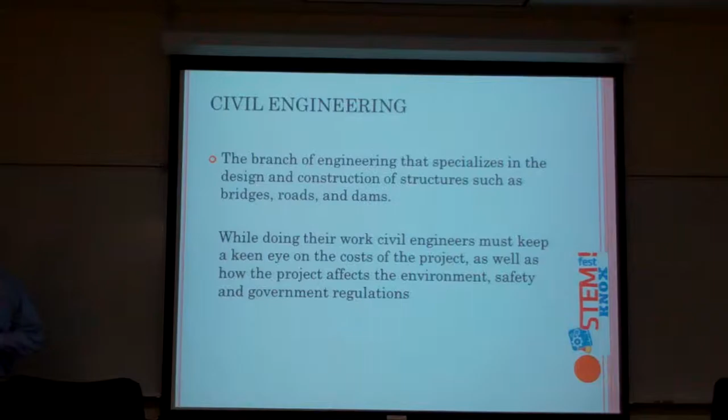Civil engineering is the branch of engineering that specializes in the design and construction of structures such as bridges, roads, and dams. This is what civil engineers do in their careers. While doing their work, civil engineers must keep a keen eye on the cost of a project as well as how it affects the environment, safety, and government regulations. So all that stuff's important - they have to think of multiple parts of their job.

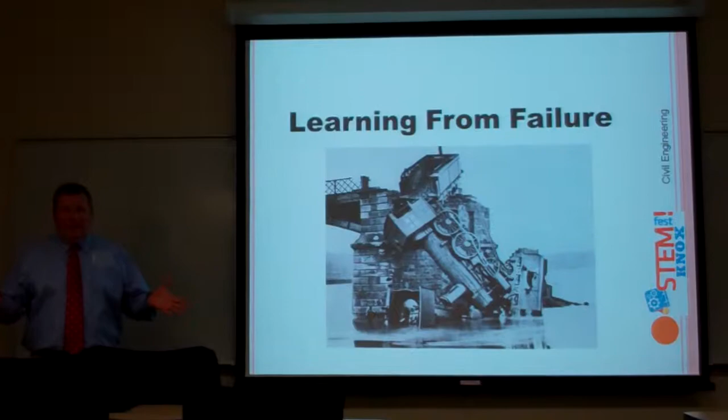An important part of building a bridge is learning from failure. You don't want failures to happen, but usually if something does fail, we study it and try to figure out why, because in all phases of our lives, that's how we learn. This is really critical in bridges, since failure can involve loss of life.

So why would we build a bridge? Anybody have ideas why you might build a bridge? I saw this and thought it was kind of like why the chicken crossed the road - to get to the other side, right? That's pretty much what a bridge does - you can cross over a natural or man-made obstacle, like a stream or river.

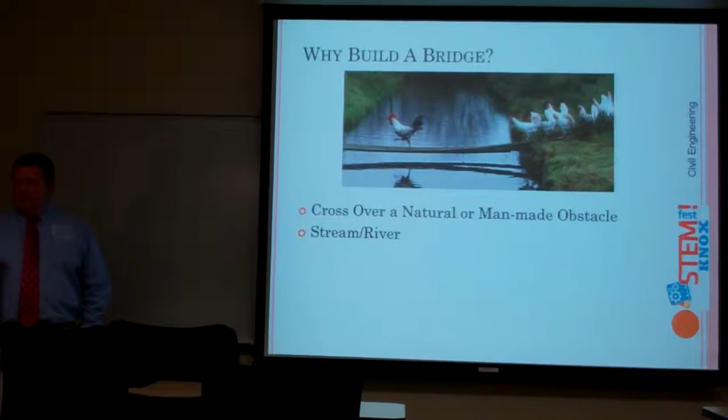Most of you probably are acquainted with bridges that cross over streams or rivers. Over highways, I'm guessing you've seen those too. Over a valley - there's a few, though I can't think of any right around here, but in mountainous areas they cut across valleys here and there. And over railroads, those are around a bit.

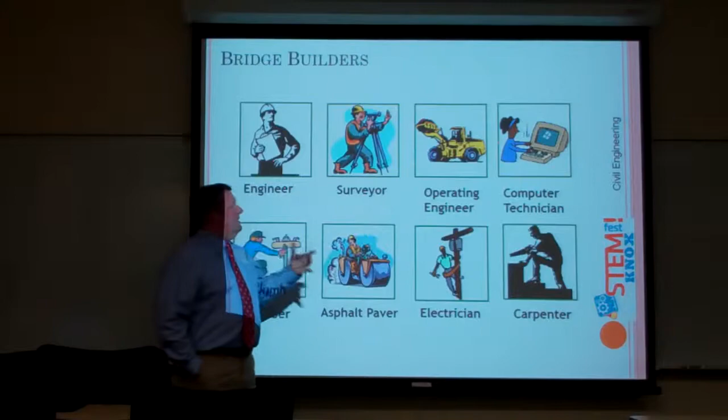There's all kinds of careers involved in building a bridge. You have engineers, surveyors, operating engineers - the people who engineer the way it's going to get built. Computer technicians have to help support it. There could be plumbers involved for plumbing, waste lines, and stormwater. Of course asphalt pavers, electricians if the bridge has lighting, and carpenters to help build the bridge and the formwork for concrete. So lots of careers involved in it.

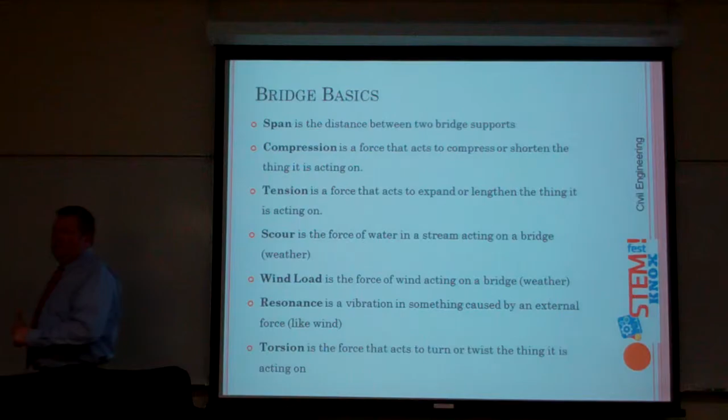Bridge basics - this is stuff you're going to want to study up on as you work on your bridge, but I'll review these real quick so you know the terms. The most important term is span - that's the distance between two bridge supports.

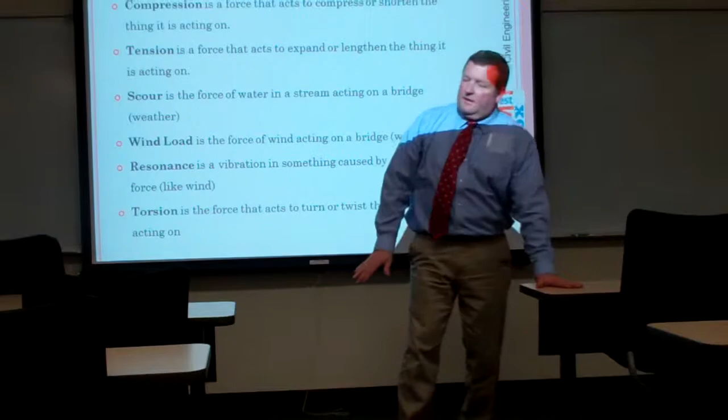If you were building a bridge from this desk to this desk, the span is the opening between them, so the bridge has to arch over that. If this was 3 feet and you build a 3-foot bridge, what would happen in total length? It's going to fall in the hole, right? So remember, span is that inside opening - the bridge has to arch over it and land on the table on each side. It's critical for you to understand span, or Rory's going to throw you out of the contest when you get there.

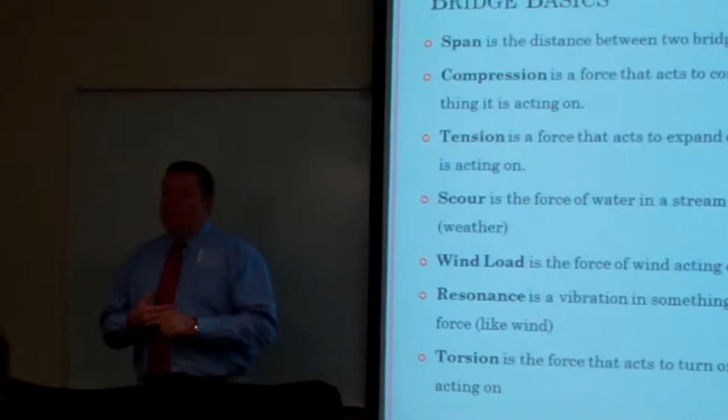Compression is just a force - when you push things together, that's a compression force, as you try to mash things. Tension is the opposite, as you try to pull things apart. So your bridge is going to have those two forces in it, compression and tension, and that's the magic of what you're going to do with these toothpicks - engineer them so they don't compress and fold up, and they don't pull apart.

Scour, that's kind of a bridge term. You shouldn't have scour with your bridge. That's a term for the water taking the footings out from under a bridge. So it's the force of water in a stream acting on a bridge.

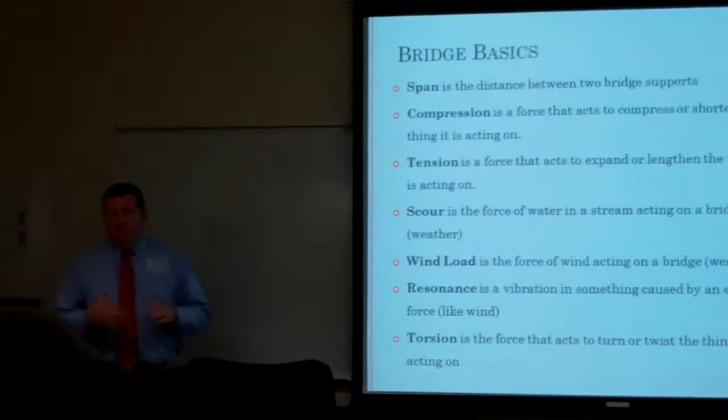Wind load, that's just the wind. You would be surprised, think of sailboats. The wind pushes pressure, so the structure has to take those pressures or loads that push on it.

Resonance is a vibration in something caused by an external force like wind. So resonance is kind of a sway. It relates to music, it's that kind of harmonic movement of something that is resonance.

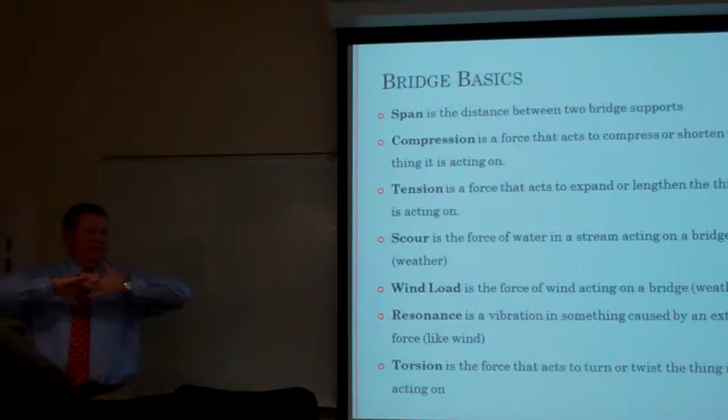Torsion is the twisting force, so things torse. We're going to see some examples of these in a failing bridge here in a bit in my video clips. Torsion is a force that tries to twist your bridge.

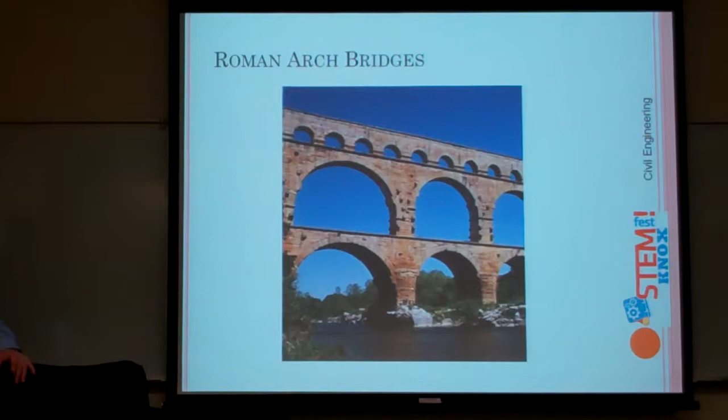History of bridge construction. Maybe that was the first bridge, I don't know, or maybe that could have been just a log across a river. That's where the concept of how to cross a stream might have come from, when logs fell across a stream and it turned into a bridge. Then the Romans got a little more complex with that. They developed the idea of an arch and started to build these complicated bridges.

Does anybody know what this really is? It's not just a roadway. Have you ever seen it and what it does? It's an aqueduct. At the very top of it, it took water into cities, a pretty neat concept of this kind of bridge. The middle deck here was for cars and people, and clear up there, there's a little trough for water that took water into cities. The Romans loved their public water.

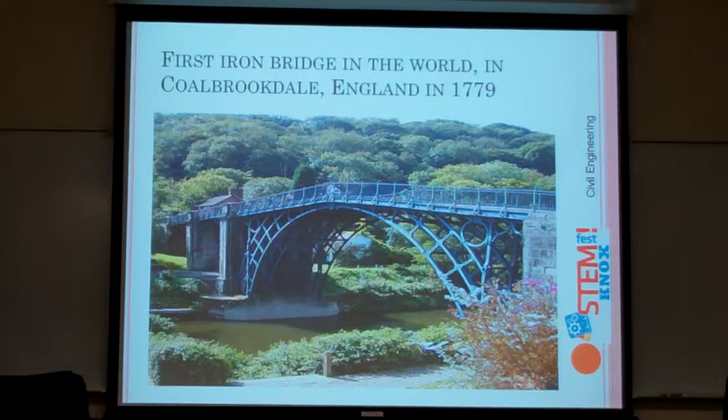This is a pretty famous bridge, the Coalbrookdale Bridge over the River Severn in England. It's important in a couple ways, it's the first metal bridge, and they developed the idea of mass-producing parts. So they cast these pieces, brought them out here and assembled a bridge.

So kind of mass production, and for an iron bridge, pretty strong. Steel and concrete bridges evolved from there, so most of our bridges today are made out of steel and concrete. You'll see some old stone arch bridges and things, but for the most part today, steel and concrete are the materials that we build bridges out of.

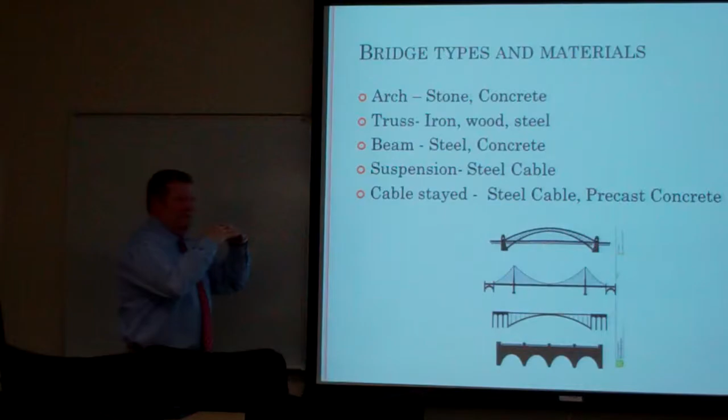There's about five different kinds of bridges covered quickly in this. So an arch, that's like the aqueduct we saw. Arches want to function all in compression, so it's all compressive force smashing down on the arch, and that holds them together. Then trusses have a combination of tension and compression in them.

So different pieces all have different forces, if you looked at this lattice work, some of those are in tension, some are in compression. It kind of varies which one's in which. Probably your toothpick bridge is going to mostly work that way, as more or less a truss, with some members in tension, some in compression.

Let's see, there's beams, just giant beams, could be made out of steel and concrete. Generally, the top of the beam is going to be in compression, the bottom in tension.

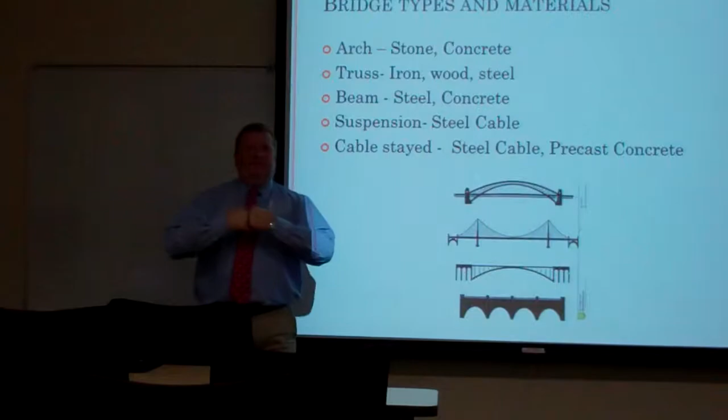Suspension bridges, steel cables, so all these cables hanging down, and this cable would be what kind of force going in those? Can you guess? Is that stuff pulling on it or pushing on it? You guys are like my class at school, nobody wants to tell me. So that's tensile force, right? That's like a string when you're pulling it, so it's tension in all those members.

Cable-stayed bridges are very similar, except the cables go right to... I don't have any diagram, there's some coming up, we'll see those. Cables go right to the bridge deck rather than a master cable.

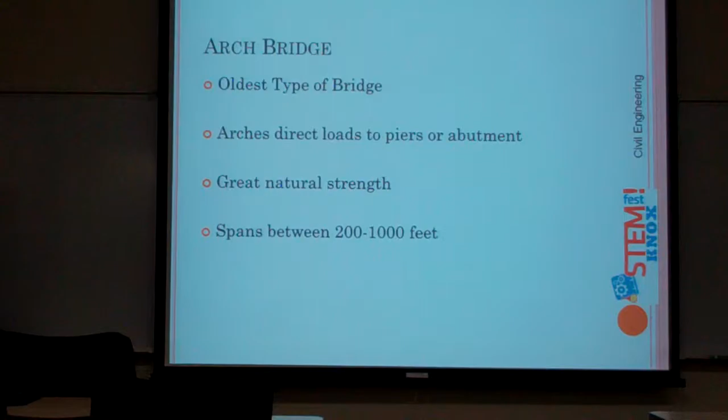So arch bridges, like we looked at the Roman one, oldest type of bridge. The arches direct loads to piers or abutments. Great natural strength, spans between 200 to 1,000 feet, and they do tend to all be in compression. Arches don't like tension, so all these pieces are pushing in on each other, especially right here at the base of the arch.

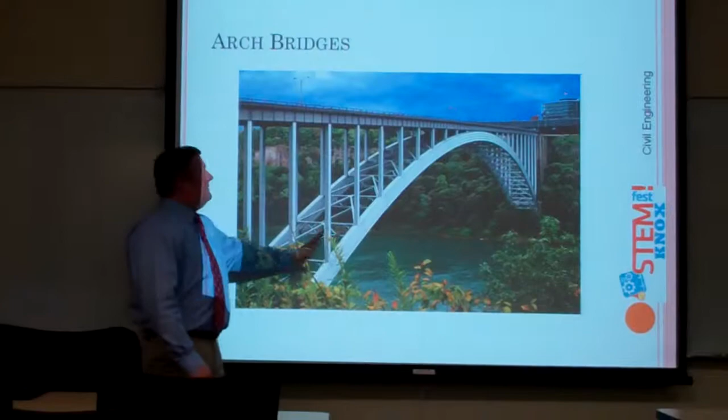There's an example of one, a stone arch bridge. And there'd be one that's kind of a steel, or concrete, I guess it's steel. So this is an arch, bottom of it in compression, and then the members bring it down.

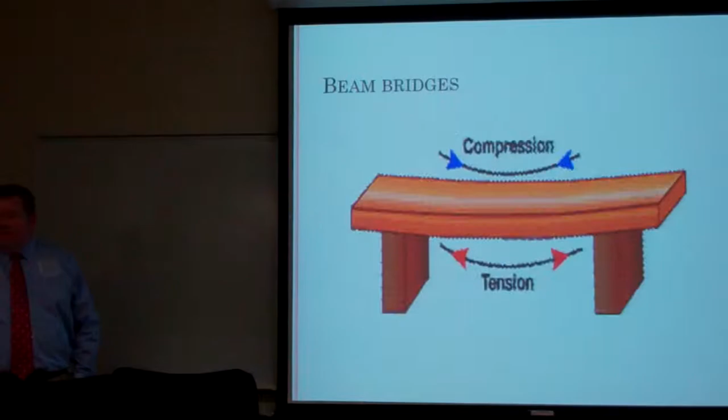Beam bridges are probably the simplest to build. They're just a simple beam. Loads are carried through piers to the ground. They're the least expensive and rarely span more than about 200 feet, so kind of medium span structures. The way it works as a beam: the top of the beam, like the roadway deck, is going to be pushed together in compression, while the bottom of the bridge will be in tension.

So that'd be an example of a beam bridge. Most of the highway bridges you see around here would be a simple beam bridge.

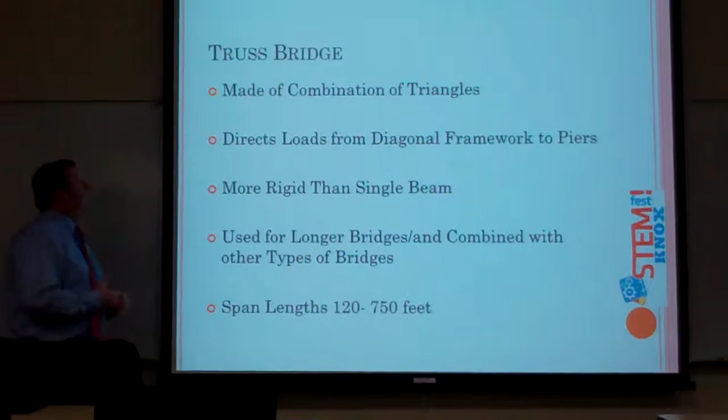Then truss bridges. This is closer to what I'm guessing you're going to build for your toothpick bridge, so it relates pretty closely to that. They're made of a combination of triangles, directing loads from the diagonal framework to the piers. The piers are what supports the bridge, and you'll be building those out of toothpicks too. Truss bridges are more rigid than a single beam, used for longer bridges, and combined with other types of bridges. The span length is a little bigger here, 120 to 750 feet.

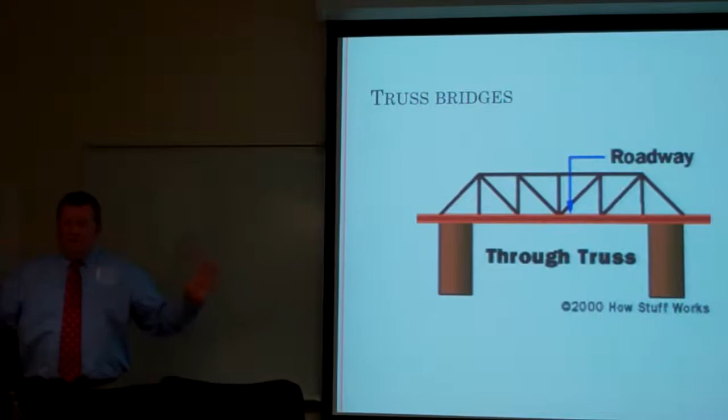There's a great example of a truss type bridge down here across the river as I drove into town, a nice big old truss bridge. I think it's for the railroad. Railroad bridges are usually pretty good examples, so think about those as you build your toothpick bridges. That's a good example of a railroad bridge.

That is a truss type bridge. Some of those members are in tension. If you look, the members in tension are rods, while the members that get more compression are more of a beam type thing. So you can almost see where the tension and compression are in that particular bridge.

There's one down in Licking County over the walking path these days, or bike trail. So that would be a truss type bridge, right?

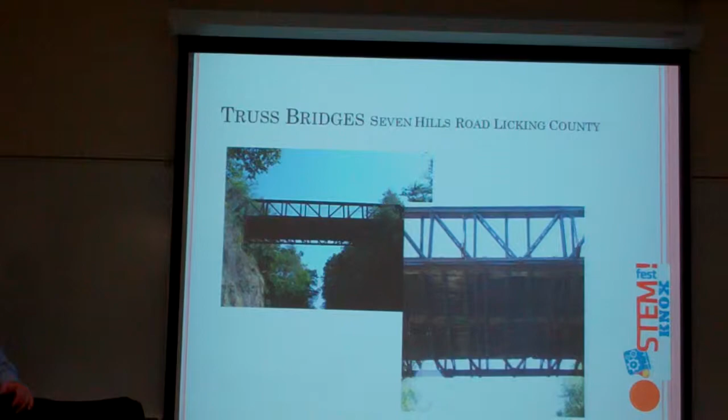One of the earliest ones was down in Cincinnati. If you've ever seen the Roebling Bridge down there, it's one of the first early suspension bridges, built around 1860, a good example of one.

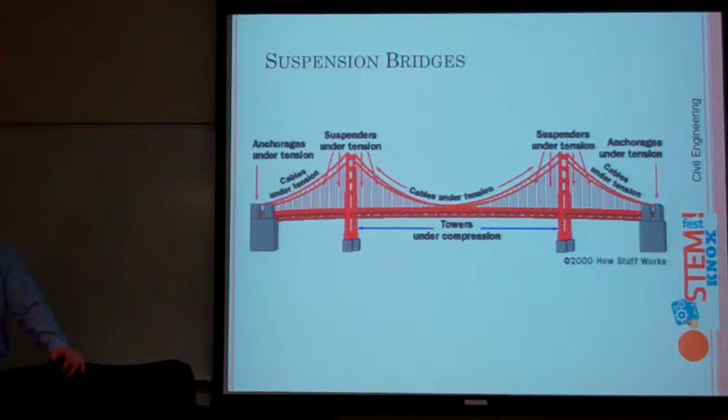So that's the way they work. The Golden Gate Bridge, you may be familiar with that—it'd be a suspension type bridge. The piers hold the compressive forces, and then the rest of the structure is mainly hanging by tensile forces. So not so easy to build with toothpicks, but you can try it.

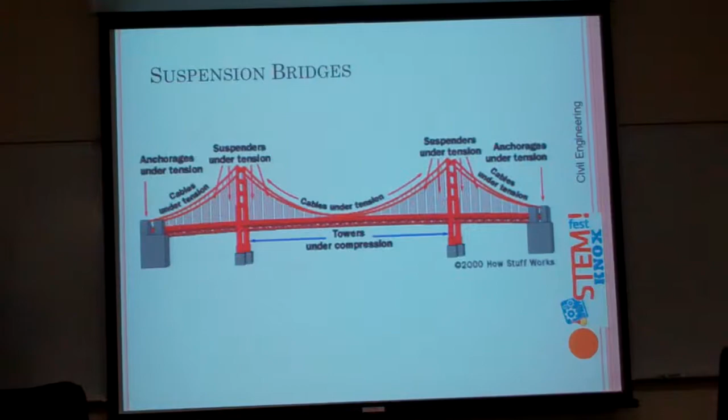Are the New York City bridges an example of suspension bridges? The Brooklyn Bridge would be by the same guy, Roebling, who did the Cincinnati bridge, and the one in New York was the next bridge after that. It's always neat that something so local preceded something slightly more famous. Same guy—his next bridge was the Brooklyn Bridge.

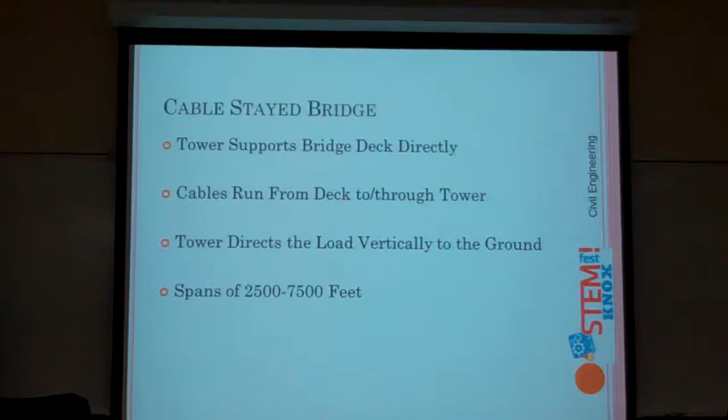Cable-stayed bridges are slightly different. They look very similar, but they're slightly different in concept. The tower supports the bridge deck directly, so it doesn't have that big main cable drape coming down with tension members to the bridge deck. Instead, towers direct the load to the ground, similar to the other type. Spans are 2,500 to 7,500 feet.

You can see how the cables themselves go straight down, kind of harp-like, out to the bridge deck. So there's an example of one—not really that main cable slinging down, but cables harped out directly to the bridge.

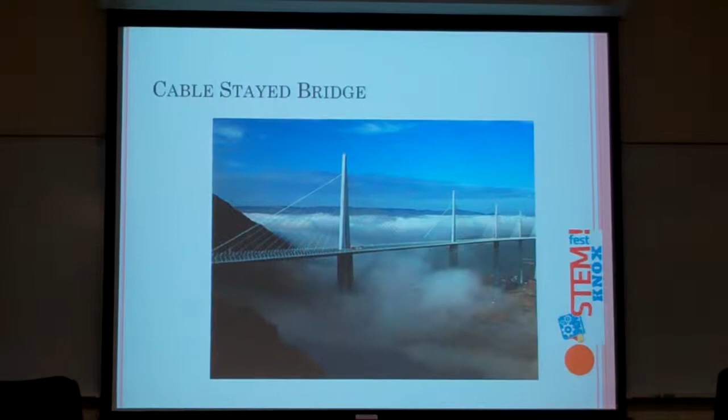Pretty neat picture. Learning from failure—now you're ready to see this. You may have to try some toothpick bridges and fail them to see where you'll have failure, just like some of these big bridges have failed.

The Tacoma Narrows Bridge in Tacoma, Washington is a famous one. We're going to look at it quick, at the Silver Bridge—I think I threw this one out—and then Minneapolis I-35, that was in the news. It seemed more recent, but I guess that was 2007.

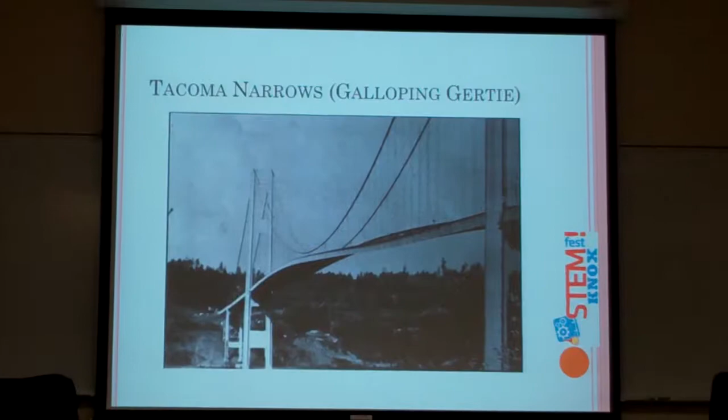So Tacoma Narrows, a famous failing bridge. Let me see if this video works—I don't guarantee it. Maybe something will happen, let's see. Has anybody seen the videos of this?

My grandmother had just crossed it. Oh, really? Yeah, that would be kind of a dramatic thing. But there's sound—I didn't try that hard.

Washington, opened only a few months ago, was built at a cost of over $6 million. But misfortune overtakes the great structure. These are some of the most amazing pictures ever recorded by a newsreel.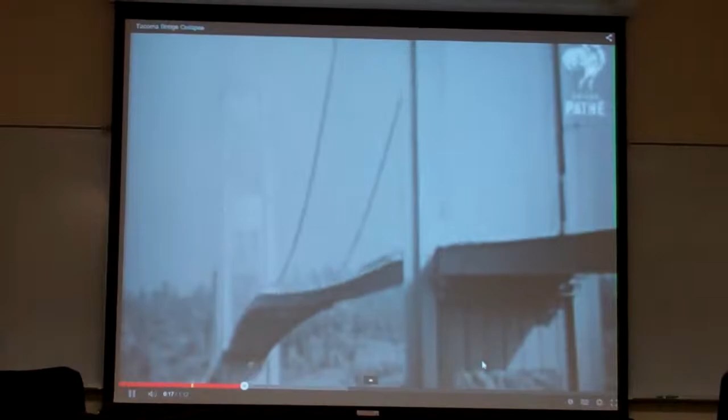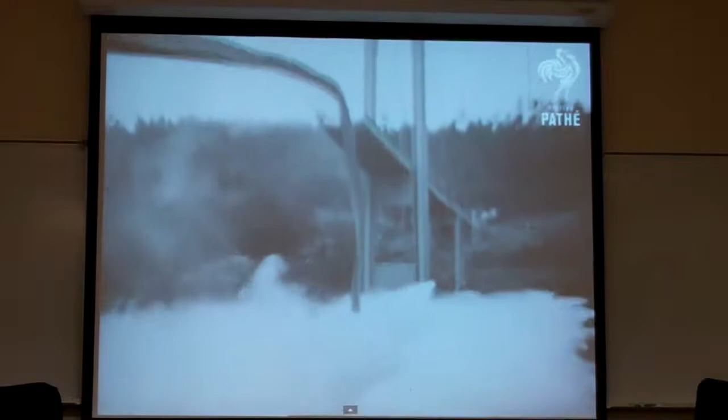The actual collapse of the world's third largest suspension bridge. Only a 35-mile-an-hour wind is blowing, but this apparently sets up a rhythmic swinging of the bridge, which increases with each swing, until it plunges into the water below. Fortunately, the only casualties were a car stalled on the bridge and a dog.

Okay, sound did work.

So that would be an example of a suspension bridge, and that would be kind of that harmonic failure, and the swinging kept grabbing the wind and making it go until it reached its failing point.

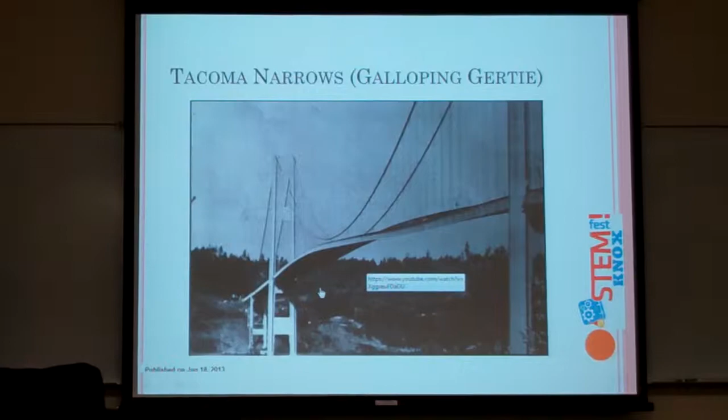So this was date of failure November 7th. So was it literally that day, same day? Yes. Oh my gosh. Was it swinging when she went across? No, she passed away so long ago. I don't really remember, but wow, to remember that story. I would think that'd be a good family story.

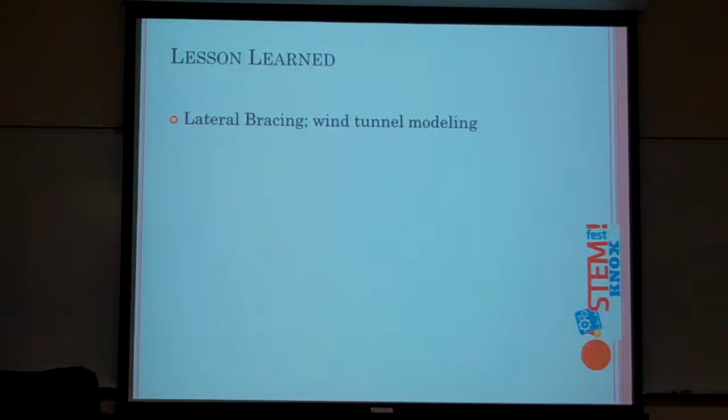So today they can do kind of computer modeling, and there's a lot more sophisticated stuff. They can see how these are going to react in the wind.

Silver Bridge, more close, that's down over the Ohio River in Gallipolis, Ohio. It was an eyebar type suspension bridge, so kind of a hybrid between a truss and suspension. Had a material failure in 1967 and fell in the river, I think about now, so it was holiday-ish time or something. Oh, it says there, December 15th.

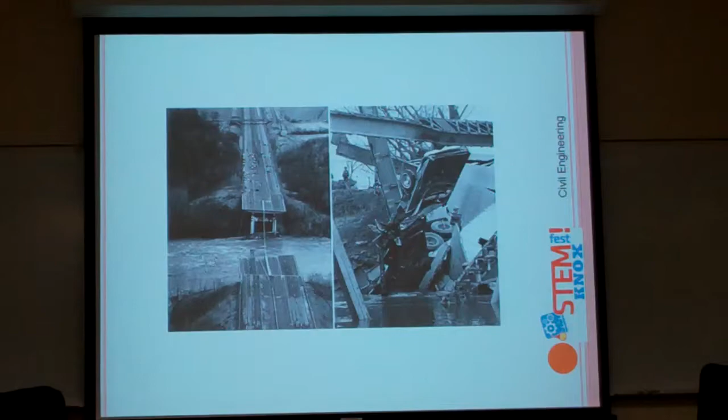So there's some pictures of it falling into the river. It was big drama back in the day. So they learned about redundancy. That's the idea of having not just one thing. If one thing fails, maybe something else will help out and carry the load. And bridge inspections and kind of checking them out.

Minneapolis I-35, that's a more recent one. That was just in 2007 in Minneapolis, Minnesota. It was a deck truss, also material failure. I think due to this, there might be some engineering problems, I forget the exact details. That was big in the news. It was a highway, a big highway.

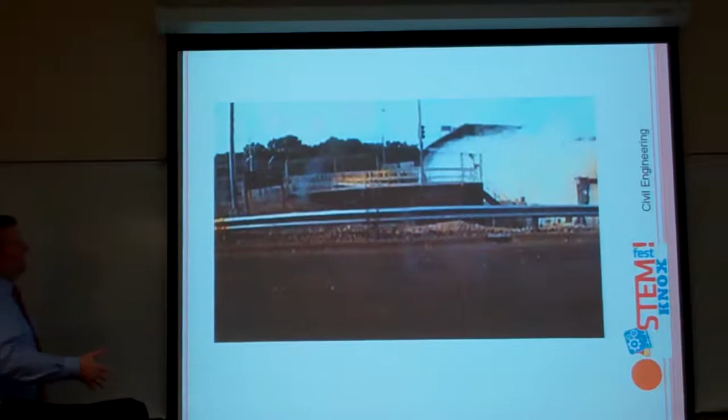You can see literally it just kind of collapses into the river. It looks fairly harmless there, but that looks a little scarier. But if you're one of those cars, I think you would have found it much more dramatic of an event. So falling bridges is not good. We have to learn from disaster and not let these things happen.

Here's some cool ones that are successful. Here's a new bridge in Columbus, Ohio. And a Bering Strait bridge proposed. This isn't built. This would link Russia and Alaska.

Have you been around any of these? Any of them close by? Old-fashioned...

Covered bridges. You might want to look at their structure. They usually have fairly simple internal structure that would be replicatable - that's the right word - could be copied for a toothpick bridge.

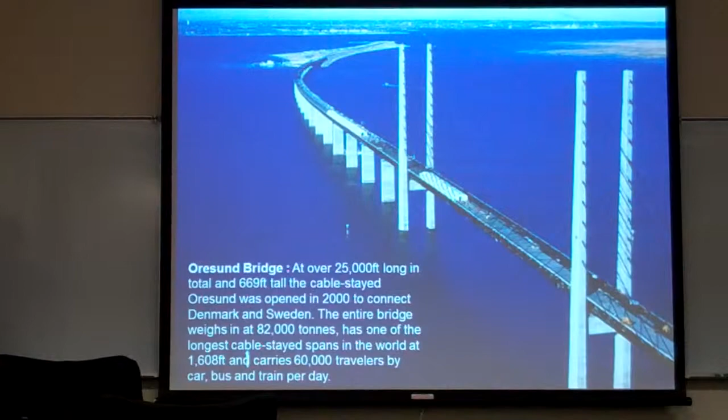This looks like a cable-stayed bridge. Where it is doesn't matter, Denmark and Sweden. Pretty fancy modern bridge. These would be kind of the combination of art and simple design, right? Since these are beautiful and also kind of artistic and dramatic.

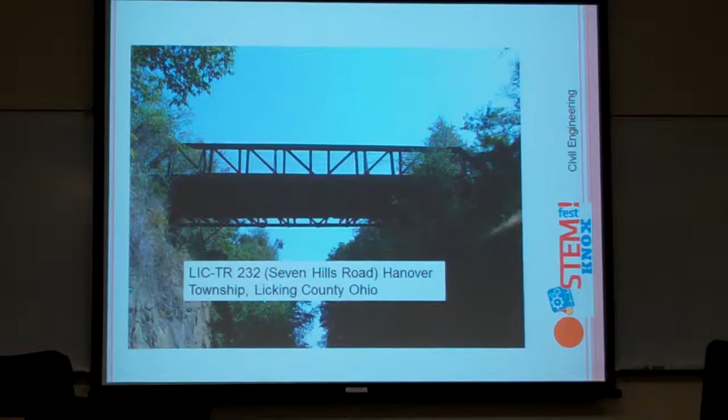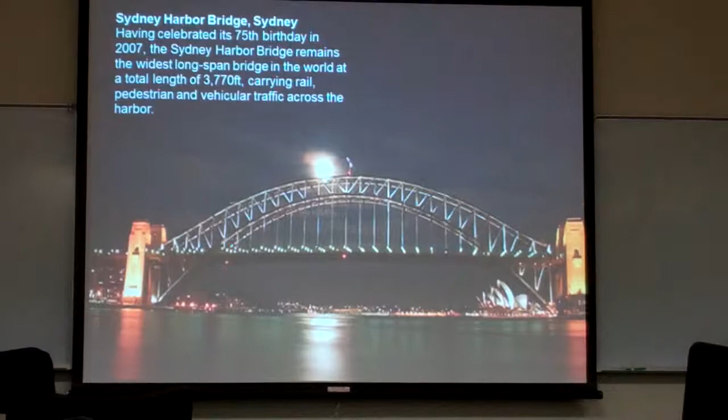And there's another kind of arch, different things going on there. Almost suspension.

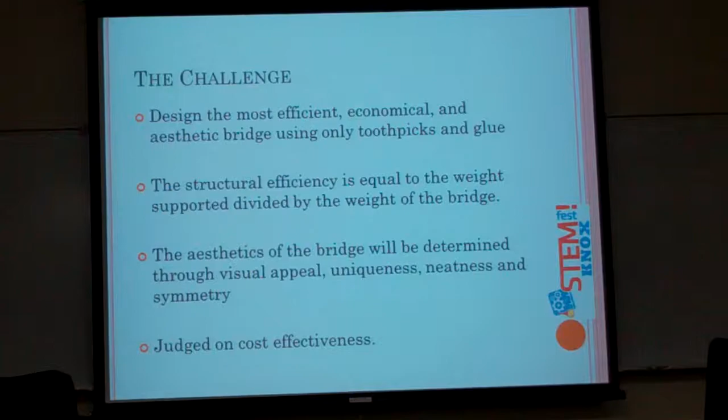Okay, so now the challenge. You ready to get to what your challenge is? So, how many of you have read the toothpick bridge problem? A couple of you have. That's good, you've done your preliminary work. And hopefully the group that's already building the bridge has read it too, I hope.

Okay, so your challenge is to design the most efficient, economical, and aesthetic bridge using only toothpicks. That's standard toothpicks, the kind you pick your teeth with, not those big hibachi sticks or other stuff, but real toothpicks.

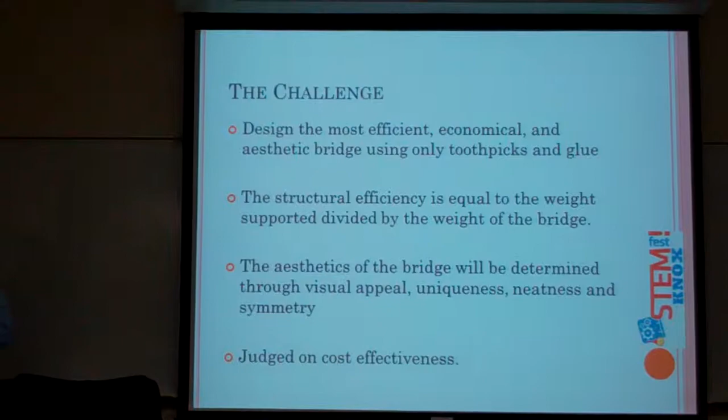The structural efficiency is going to be equal to the weight supported divided by the weight of the bridge, and that's going to give you a ratio of how many times its own weight the bridge carries, is essentially what that comes down to. So you want the bridge to be fairly light and efficient and carry lots of weight. If you build a really heavy bridge, that means in proportion it's going to have to carry that much more weight to still get a better ratio.

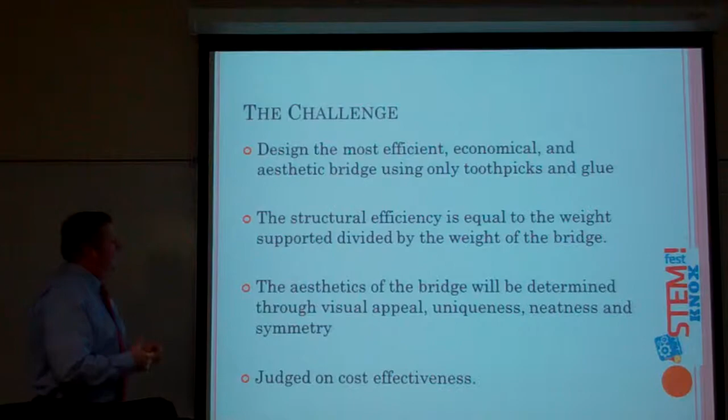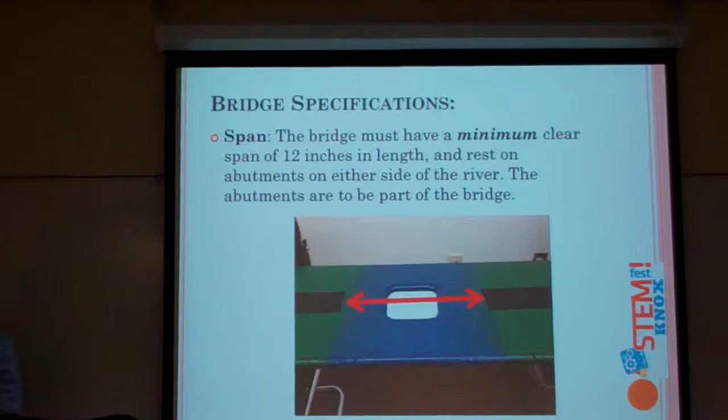So now, span. Remember I said that word is really important. Span is important, the bridge must have a minimum clear span, so that's that. If I were building a bridge over these tables, the bridge would, the abutment or the pier would sit out there. It has to come across to over here.

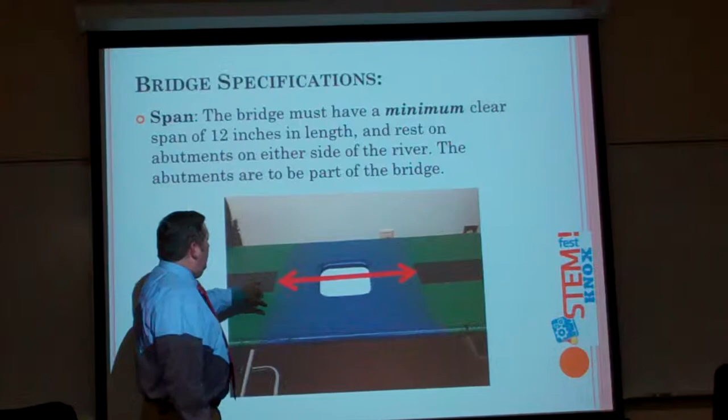That's your span, is this open space, the river, the water. You don't want your bridge to end up in the water. If you look here, here's the blue water, so there's the river. The road kind of comes to here, so this must be 12 inches. The bridge is going to have to sit out here. You don't want the feet of the bridge in the water. The water is 12 inches wide. Do not put parts of the bridge in the water.

And the other trick, well, I guess we'll see more of that coming up here. So is that all clear? Any questions on span? That's a critical concept, I want to make sure you're all comfortable with the idea of span. All good on that?

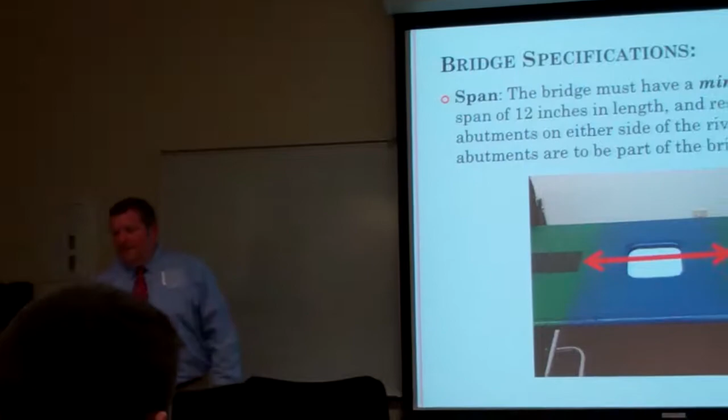So then you're going to put a bridge deck on it. The bridge deck interior width must be at least 1.5 inches, and we'll talk more about why. This will be tested with a matchbox car. The deck must be solid so that the car can travel the length of the bridge, and then we're going to have a loading block that's going to go through the deck. So there's going to have to be a hole. I've got more diagrams of this. There's going to be a hole here in the middle, and the loading block that's going to try to break your bridge is going to fit on top of that.

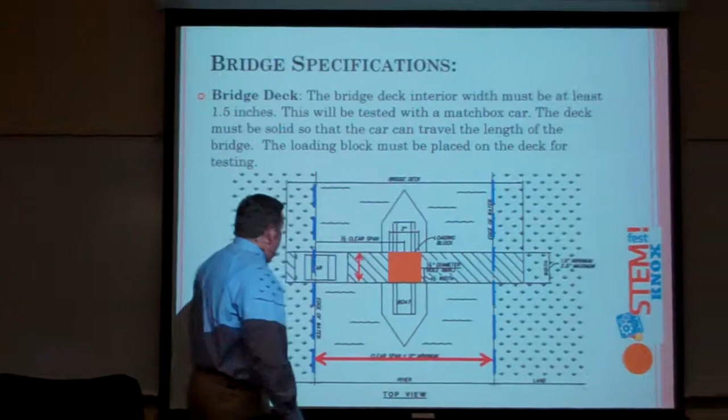Here's your span, once again, remember, here's the water, edge to water edge. The bridge is going to be longer than that, right? Because you got to get your bridge out here so it bears on the land on each side. The water's 12 inches wide, so there's your span. Here's the bridge deck width, so the width of that has to be 1.5 inches.

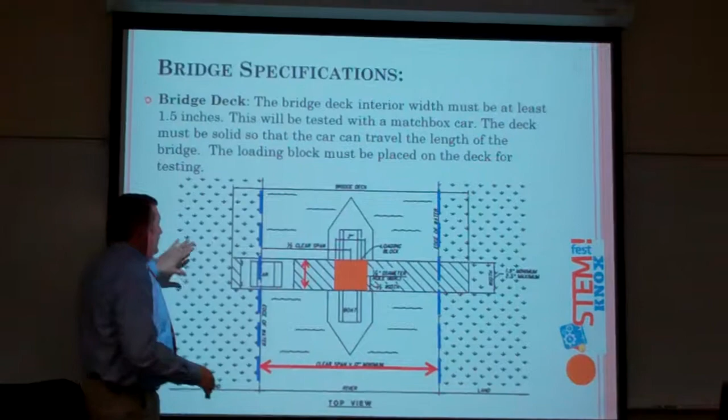Now the car doesn't have to get back down to the road, right? It's just going to be a flat deck, so don't worry about having ramps up to get the car onto the bridge. It's going to magically teleport onto your bridge and drive across it. The forklift is going to put it on the bridge and off on each end or something. So don't worry, you don't have to ramp up to it. Pretend that the bridge ramps are built out there for you, you're going to neglect that part of the problem. But you do need a bridge deck that the car can drive across, except for you're going to have a giant pothole in the middle of the bridge. That's going to be where the wire goes through, the rod goes through.

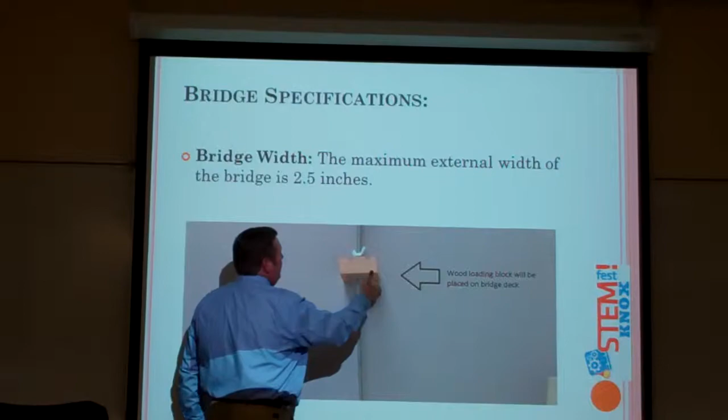So there's the rod that's going to go through your bridge. This thing has to set down in that bridge deck. That's why you need width and a flat area at the middle of the bridge, because this rod's going to go through, and then the machine or weighting device is going to attach to the bottom of that rod.

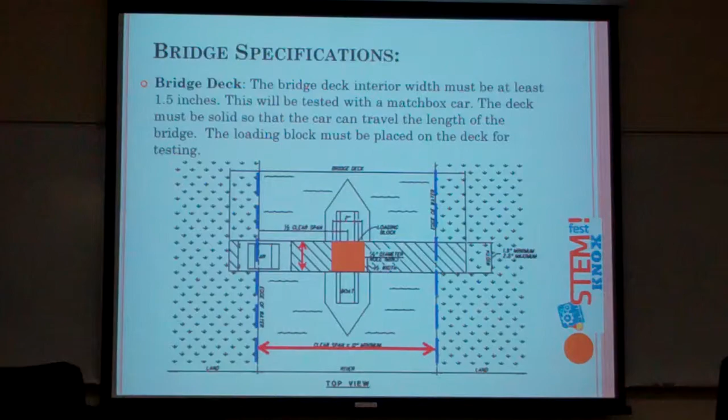So you need at most 2.5 inches wide in the bridge. This area has to be 2.5 inches max, 1.5 minimum. That's the confusing part. 1.5 inches minimum because the block is that big, but you don't want to exceed 2.5 inches on the deck of the bridge.

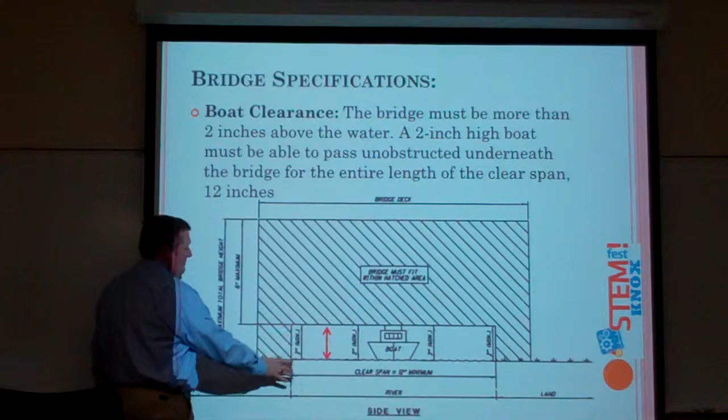And then the other trick that causes problems for people is you've got to get the bridge up so a boat can go under it. So you're going to build these feet. We're not going to provide the feet. You've got to build an abutment, build a pier, build something that holds your bridge up 2 inches off of the water, so a little 2-inch boat can float down the river and go under your bridge all the way.

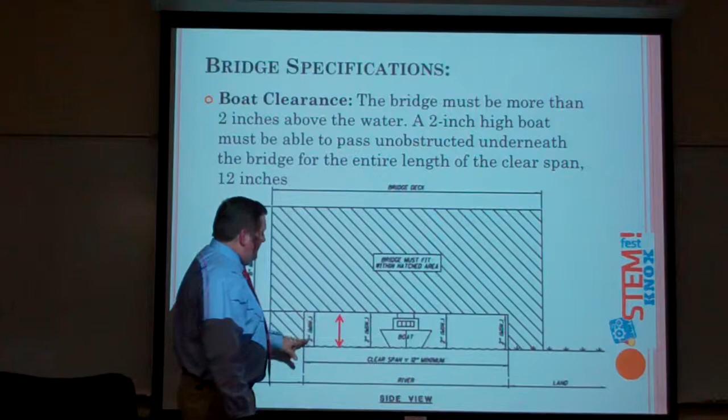Across this 12-inch span, all the way through there, a boat has to be able to cross. So no part of your bridge can be out here in the water. It has to be 2 inches up, so you need a 2-inch by 12-inch area that's clear under your bridge. Does that all make sense?

So you're gonna build the height of the bridge. Like I said, if a car drives up to it, don't worry about ramps to get it on. Your car is gonna drive up here, and we'll just pretend that somehow it got up on.

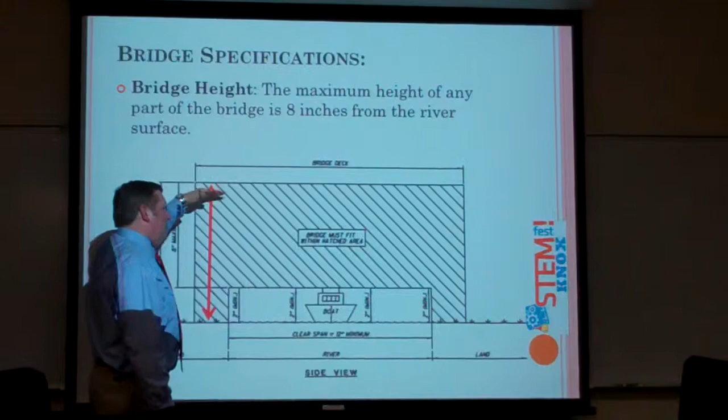The maximum height for the bridge, for any part of it, is 8 inches. So nothing can be over 8 inches tall. It doesn't have to be 8 inches tall, it can be a lot shorter than that. But maximum height for the structure is 8 inches. Nothing taller than 8 inches, it doesn't have to be 8 inches.

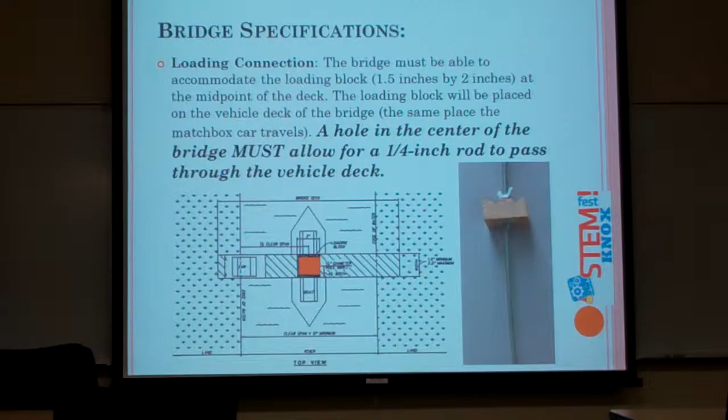Loading connection, that's a critical component. The bridge must be able to accommodate the loading block, which is about 1.5 by 2 inches. It's going to need a hole at the midpoint of the deck, so it sits where the car would drive, in the same place the matchbox car is going to drive across. There has to be a hole in the center of the bridge that will allow that 1/4 inch rod to pass through the vehicle deck.

So right in the middle of this orange block, there'd be a 1/4 inch hole that the rod can go through. So this rod is going to have to go down through your bridge with a hole in the middle, 1/4 inch. Does that make sense, everybody?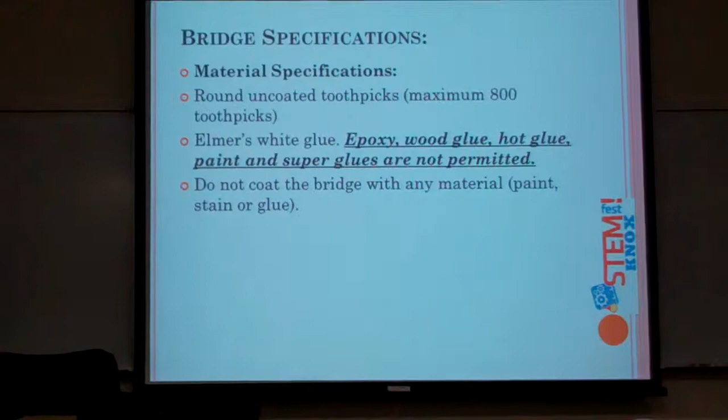And then material specifications: you're only allowed to use round, uncoated toothpicks. You can't use more than 800 toothpicks. You'll be surprised, you don't need a ton of toothpicks to do a good bridge. The more toothpicks you use, the heavier the bridge is, the more weight you're going to have to end up carrying.

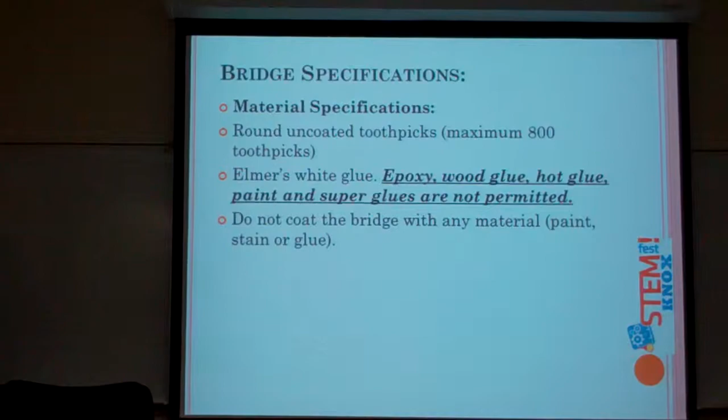You're only allowed to use good old Elmer's white glue. You can't use epoxy, wood glue, hot glue, and you can't paint, and you can't use super glue. So only good old-fashioned Elmer's glue. And even though it might be pretty, you can't coat the bridge with any material, paint, or stain, so it's got to be raw toothpicks.

Any questions on any of that? So just plain old white Elmer's glue. Do you give them the glue and the toothpicks? Well, there you go, so there's no way you can go wrong on that.

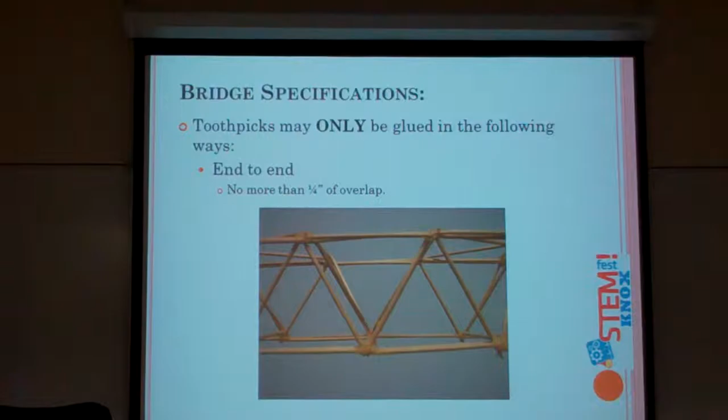And these are showing, hopefully, some ways that you can glue the toothpicks. Remember, toothpicks can only be glued in the following ways: end to end, so you can overlap the tips no more than a 1/4 inch. So right here, this kind of connection can't be more than a 1/4 inch, and up here same thing. Overlaps no more than a 1/4 inch at all these joints.

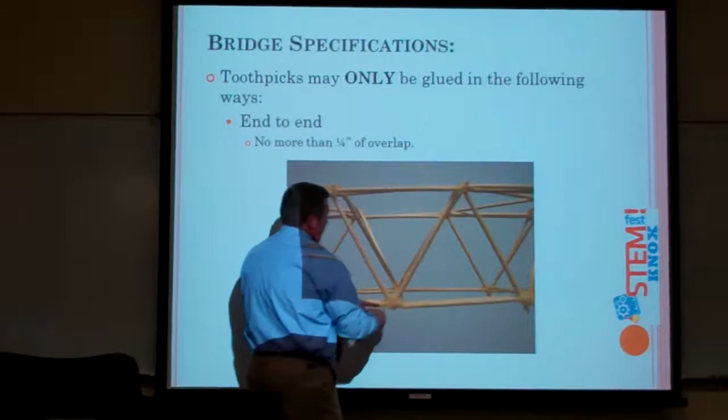If you look at that, they're pretty much tip to tip, and you're seeing a little blob of glue there. So tip to tip, blobs of glue, end to end, 1/4 inch overlap maximum.

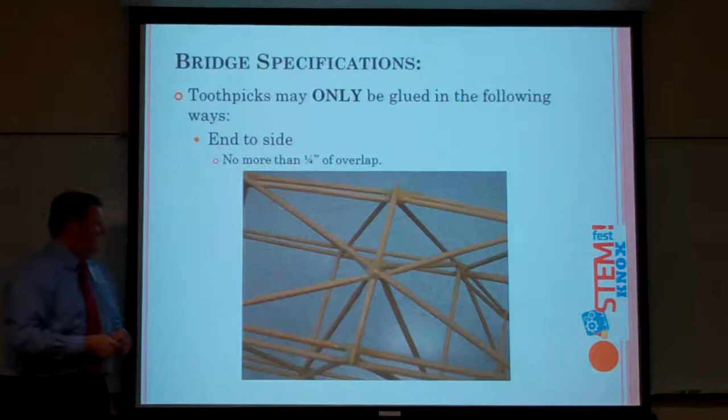End to side, so you can glue into the side of another toothpick. Here's a toothpick going across, with toothpicks coming into the side of that toothpick. About a 1/4 inch overlap, no more, and these don't really have much overlap at all. You can also glue tip to side. That's another legal way to glue. So tip to tip, tip to side.

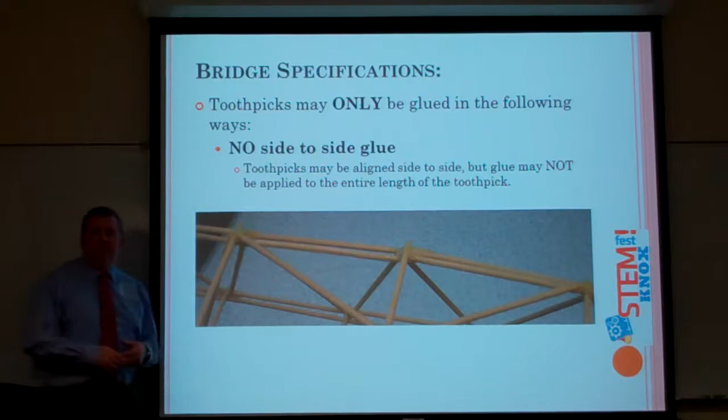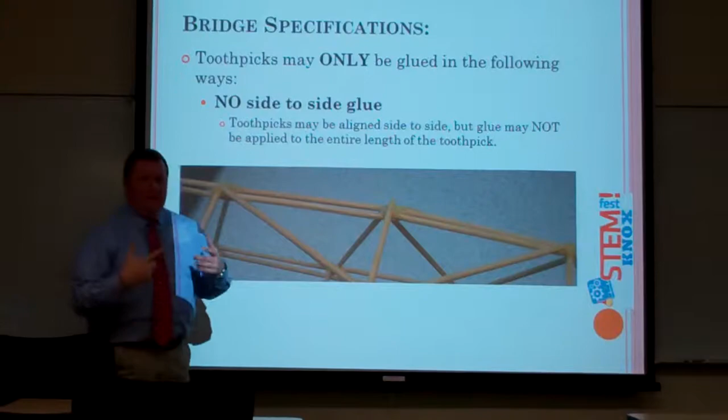And no side to side glue. If you look, there's 2 toothpicks here, right? Is there side to side glue, the toothpicks glued together this way? No, so you can't put glue in here. You can only have your glue down at the tips. You can let your toothpicks touch, but don't make the judges get their magnifying glass out looking for glue. You shouldn't have glue there. No bundling, no creating laminated beams, no glue side to side. So this area in here, no glue. Only at those 1/4 inch tips. Glue in the tips, here, here, here.

That's the only place you should see the little beads of glue in the connections. You'll want to put your bridge together and then come back and re-glue those a time or two, making sure you get a nice glob of glue in those tips. But once again, you can't spread it out beyond a 1/4 inch in those connections. Any questions? That's another critical area.

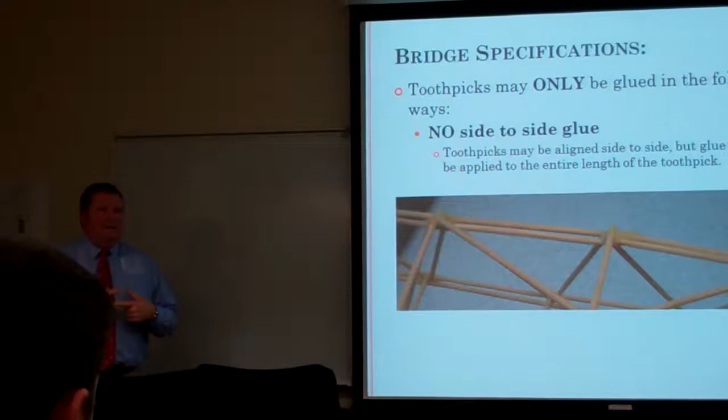No side-to-side glue. Rory's going to be looking for that. She's out to find the side-to-side this year. I'm making her sound nasty, aren't I? Yes, she's really very nice. Don't be scared—unless you do side-to-side gluing.

Bridge specifications: any bridge not meeting these specifications will be penalized. I forget exactly, but in the rules we've set up what your punishment's going to be—anything physical.

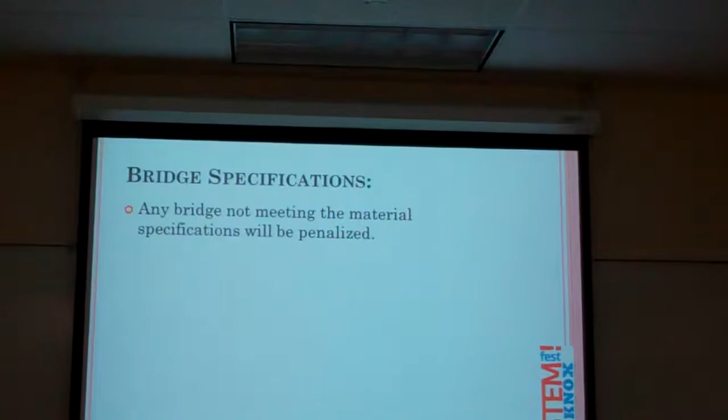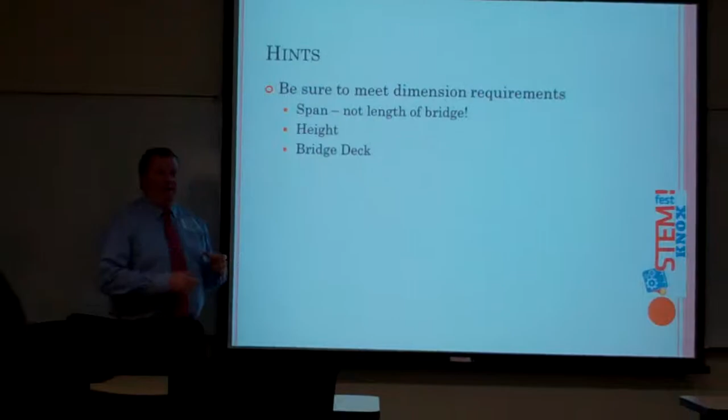So here are some hints. Make absolutely sure you understand that word span. Go home, and when you start working on your bridge, do some research on span and find diagrams that properly show span. Make sure you understand the height of the bridge. Remember, do you remember how high the maximum of a bridge can be? There'll be a quiz here in a minute. How high? Very good, you are paying attention. That's great. And your bridge deck—remember you've got to have a solid bridge deck that you can drive that matchbox car across. What are you going to put in the middle?

You know? You're going to have that 1/4-inch hole, right? You guys are going to do good. You're going to do very good.

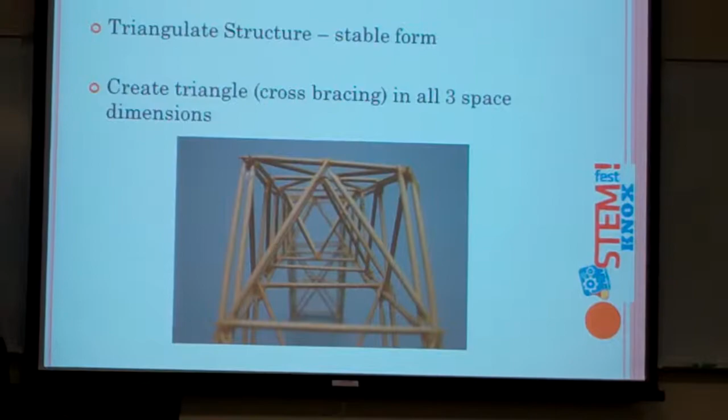Triangulate the structure—if you remember those truss-type bridges we looked at, triangles. So every direction you look at your bridge, if you don't see triangles, that's setting up for failure. A square without a triangle wants to collapse, and the only thing holding that square up is the moment force or the glue in the joints. If there's no triangle connecting it together, they tend to want to fold up. A square is not a very stable form. Here's your square, but if you look down through there, multiple places, it triangulates, and there's pieces in there that triangulate the structure. So you want to see triangles.

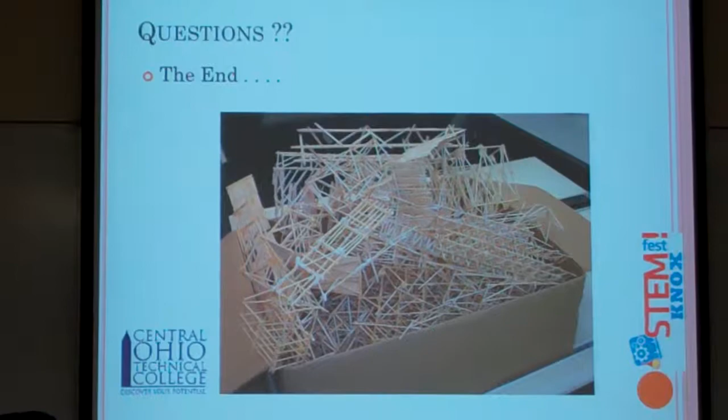Hold your bridge—a lot of people are real good at, as you look at it from the side, the way it spans the river, with great triangles. But when you look at it this way, they forget, and the bridge just wants to fold up, even though it's a real good truss. They fold up, and that's what happens—it doesn't work. My class just did their bridges this week, so this is the debris from the successful and unsuccessful bridges. Lots of hours of toothpick gluing in there.

So any questions on that? Can I help you with any specific questions?